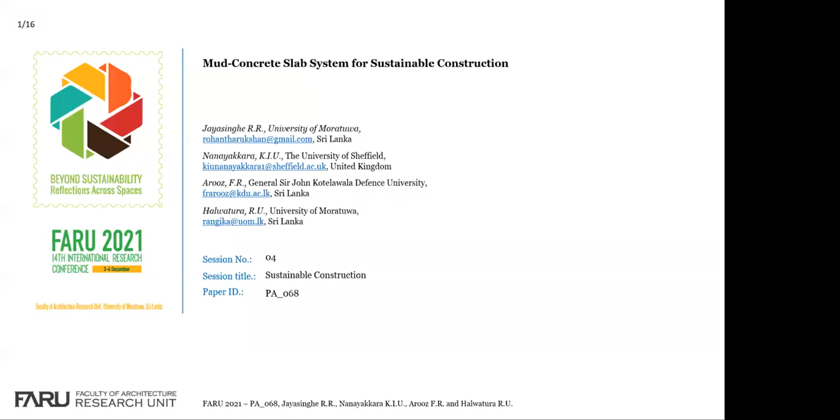Good morning, everyone. I am Rohan Jayasinghe, presenting author of the paper called Mud-Concrete Slab System for Sustainable Construction.

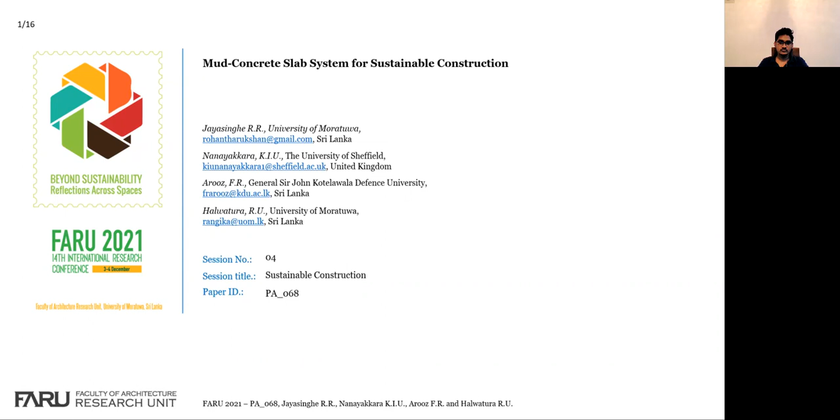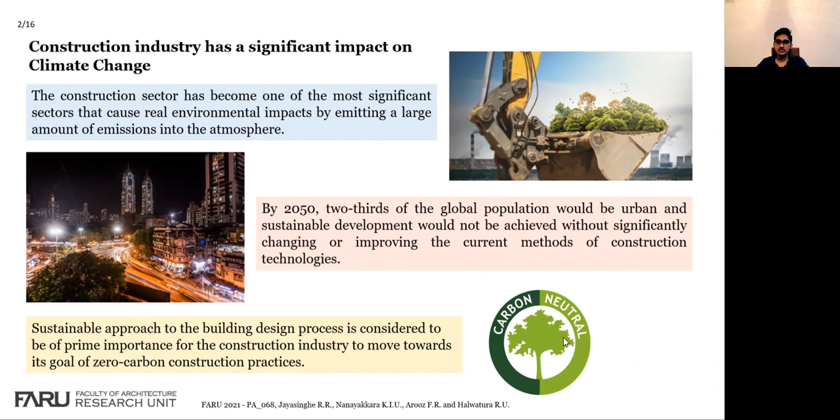Construction industry has a significant impact on climate change. Almost 50% of the oil resources consumed across the planet are used in the construction industry, making it one of the least sustainable industries in the world. Also, by 2050, two-thirds of the global population will be urban. So, sustainable development cannot be achieved without significantly transforming the way we build and manage our urban spaces.

So to address the current crisis in the construction industry, as well as the rapid population growth, we need to move toward a more sustainable approach to the building design process. So building with earth was found to be the most sustainable and environment friendly construction practice, which can be implemented in the modern construction industry as well.

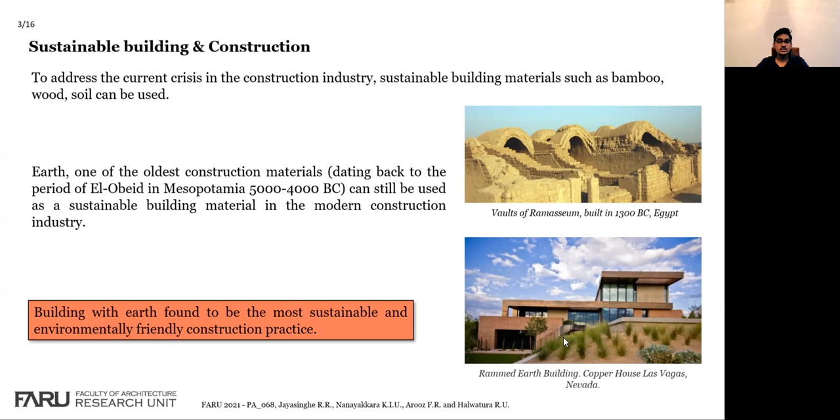So there are many earthen construction practices and technologies available for walling systems and flooring systems, such as CSEB walls, rammed earth walls, mud concrete walls, Adobe floor systems, or mud concrete flooring systems. However, no reliable technique has been developed or adapted as a slab system using earthen materials.

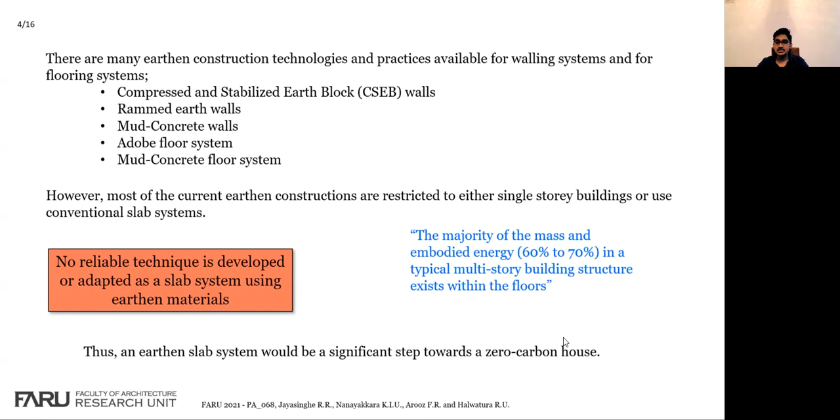Also, when we are considering the embodied energy part, 60 to 70% in a typical multi-story building structure exists within its flooring system. So if we can introduce an earthen slab system, that would be a significant step toward the zero carbon housing unit.

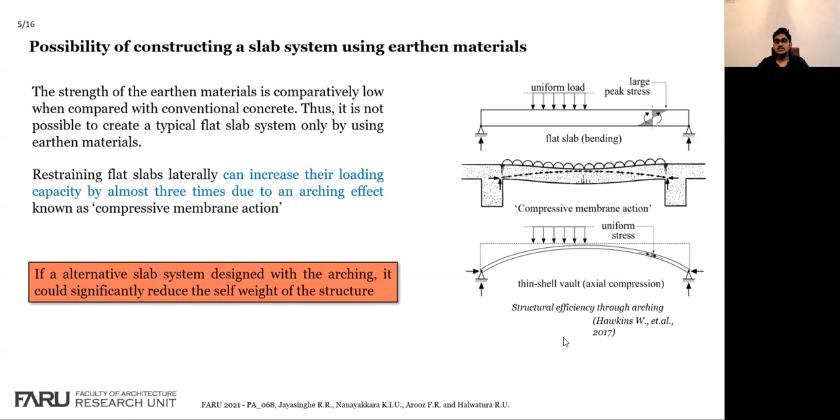So when considering the possibility of constructing a slab system using earthen materials, the strength of the earthen material is comparatively low when compared with conventional concrete. Therefore, it is not possible to create a typical flat slab system only by using earthen materials. So restraining the flat slab laterally can increase the loading capacity by almost 3 times due to an arching effect known as compressive membrane action. So if an alternative slab system is designed with the arching effect, it could significantly reduce the self-weight of the structure.

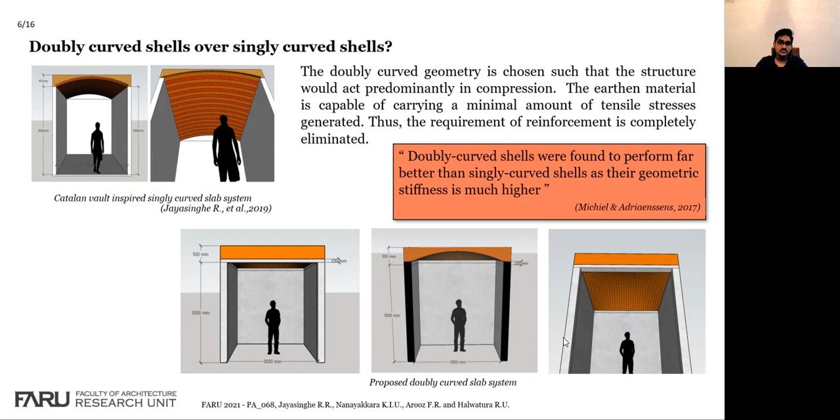After that, we considered singly curved shells and doubly curved shells to implement as a slab system. Here we found out that the doubly curved shells perform far better than the singly curved shells, as the geometrical stiffness is much higher.

As for the material for the proposed slab system, a novel construction practice, the mud concrete technique, was selected, because the initial and operational cost is comparatively low when compared with cement blocks or burnt bricks, and almost 92% of a mud concrete element can be recycled and reused by crushing. So due to these facts, mud concrete was selected as the main material.

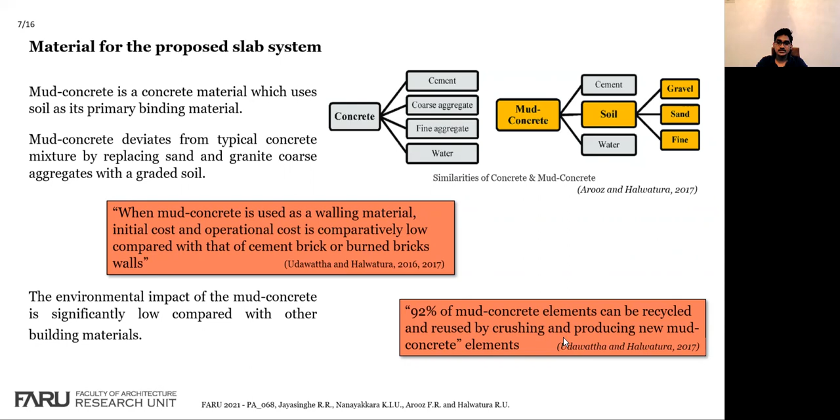To develop the size and shape for the slab system, through literature, we identified that for a typical urban or suburban dwelling unit in Sri Lanka, a column to column or wall to wall distance of 3 meters is typical. So for our doubly curved shell structure, a 3 meter by 3 meter square footprint was selected, and the rise of the shell was selected as L by 10, where L equals the span, and the thickness of the shell and ballast loading was considered at 50 millimeters each.

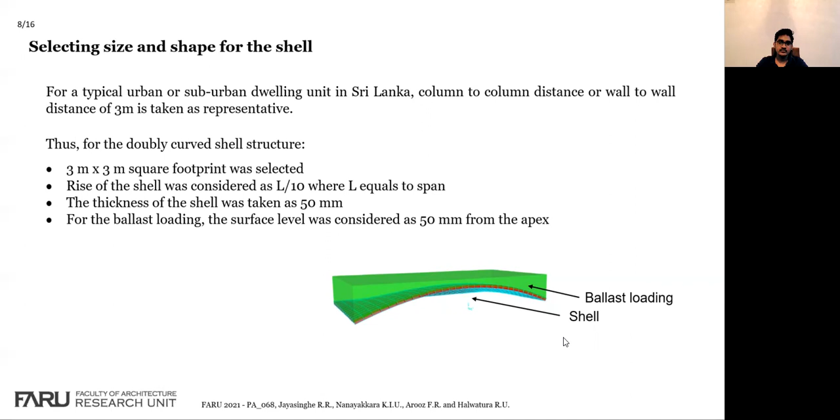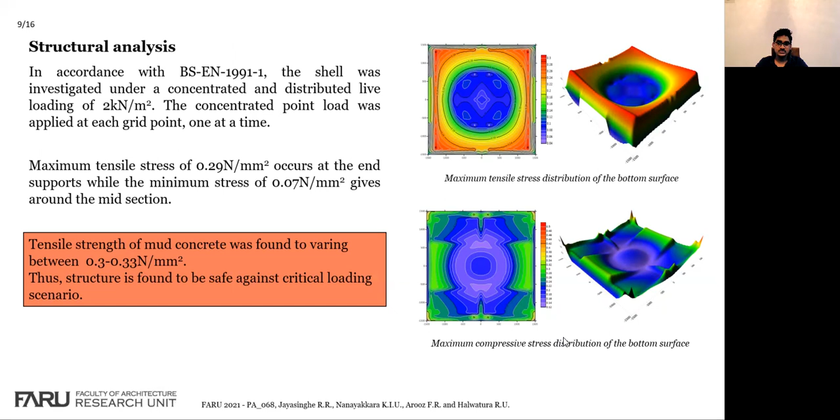Here we modeled several loading case scenarios. We identified that the structure is safe against critical loading cases, and the figure shows the maximum stresses of the bottom surface during the most critical case.

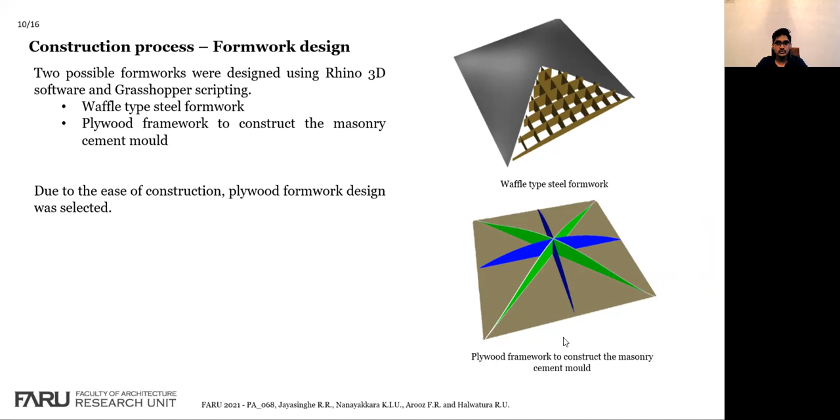As for the formwork design for the construction, we identified two possible formworks, designed using the Rhino 3D software and Grasshopper scripting. The first one is the waffle type steel formwork, and the second one is plywood formwork to construct the masonry cement mold. Due to the ease of construction, the plywood formwork design was selected to construct a masonry mold, which will act as formwork for the wall section later.

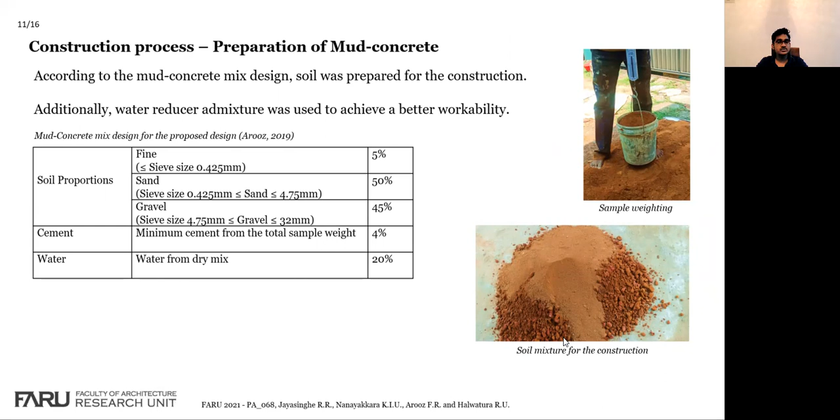So this is the mix design of the mud concrete mix which was used for the construction. Additionally, to achieve better workability, water reducing admixtures were also used. Here, this illustrates the complete construction sequence. We pour the mud concrete mix in two separate steps: one for the shell structure and then the ballast loading. It is shown in the 7th and 10th figures.

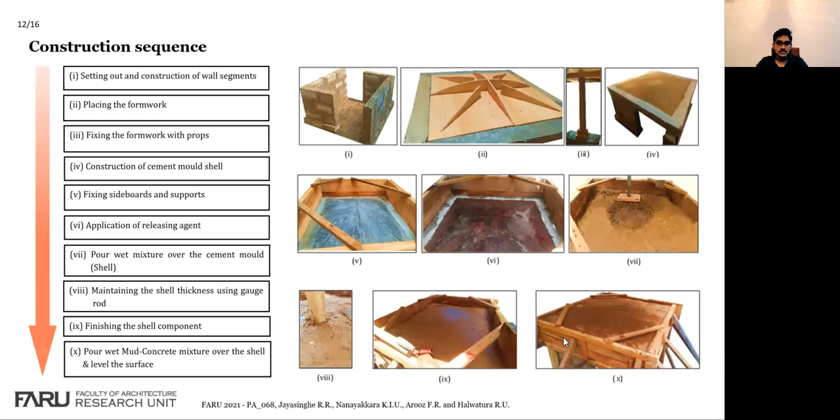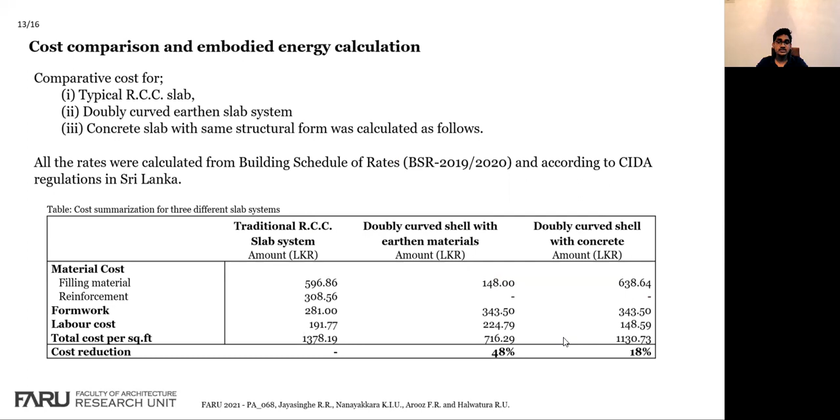For the cost comparison and embodied energy calculation, comparative cost for a typical RCC slab system, the doubly curved earthen slab system, and a concrete slab with the same structural form was calculated as follows. According to the cost summary, a 48% cost reduction can be expected from the doubly curved earthen slab system, while for the concrete slab with the same structural form it was found to be 18%. Similar trends were observed in the embodied energy for doubly curved shells with earthen materials.

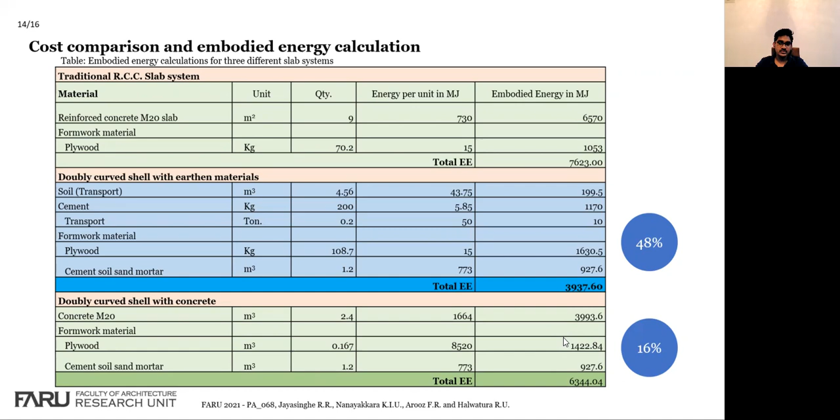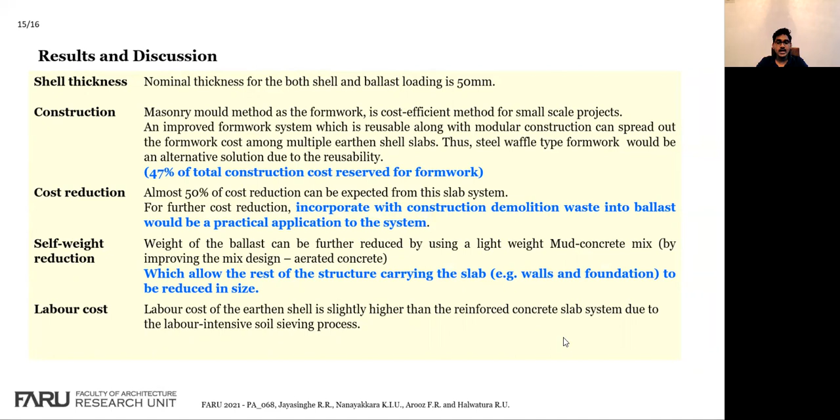As for future works, we are hoping to build an actual scale model next year to further investigate the slab system under dynamic loading as well as seismic loading. Also, we are hoping to further improve our designs to construct possible hybrid systems.